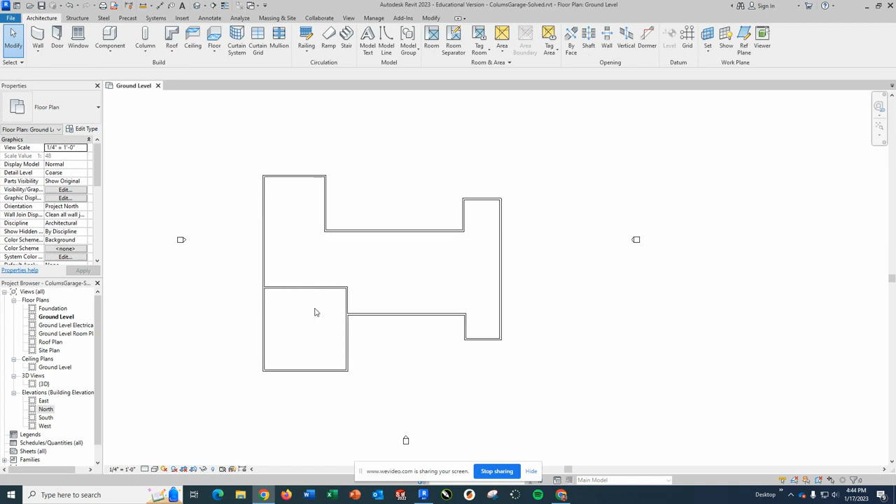This is the floor plan that you've been given, with the garage area as the only enclosed area. The rest of this, just consider the rest of the house. If you open the foundation level, you will see that you have your foundation wall and your footer already in.

So what we're going to be doing is working mostly in the foundation level, and we're going to be modifying it so that we can put in the correct foundation wall and footer to enclose the garage area. Because remember, areas that don't have space underneath that are a complete fill will have the footer and foundation wall enclosing them. They will be filled with something depending on what's available or what's used by code there before the concrete is poured for that garage area.

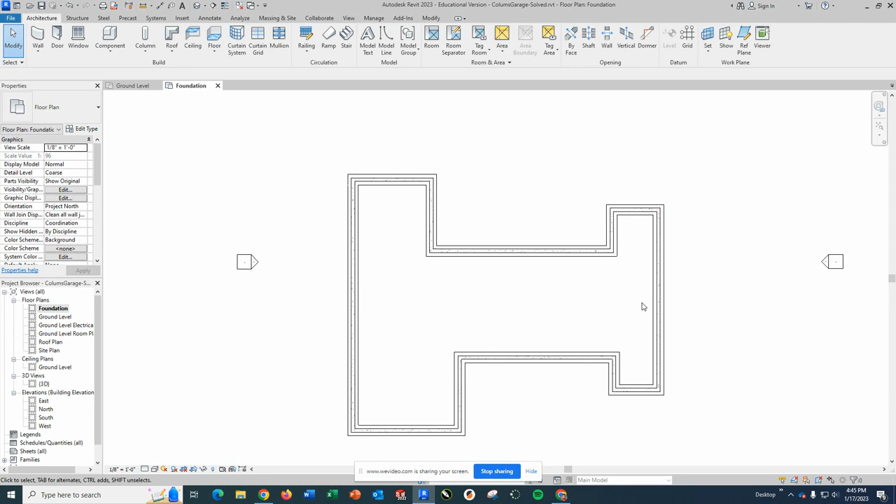In the rest of the house, a lot of this will be open space. And we will have to put, because what would happen, especially in a house of this shape, is that you would likely have a beam that runs down the middle, and we're going to support that beam with columns, and that's what we're going to put in.

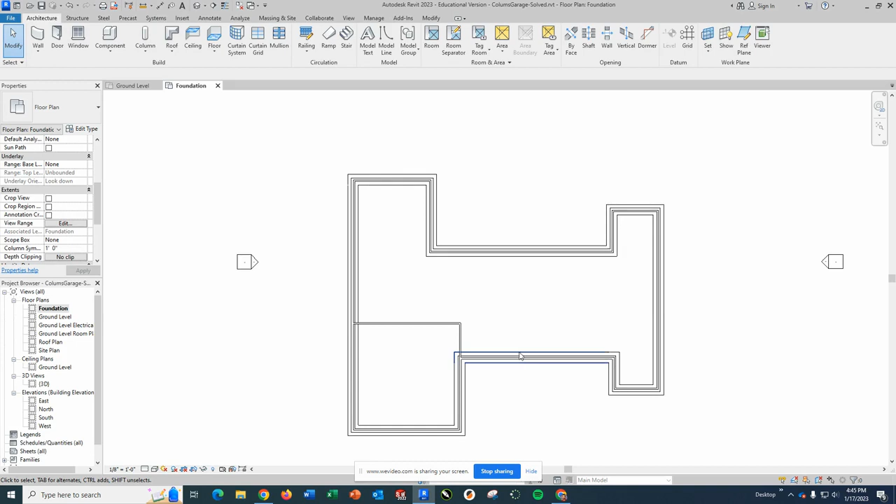So to start that, the first thing I'm going to do is go to my view range and set it so that my cut plane is above the ground level. So if I set it at 4 feet, I should be able to see all of the walls, which I can now do. And as you can see, some of the walls don't line up great.

So we'll actually do the garage foundation first. The first thing I'm going to do is pick a wall and do the regular foundation wall under this wall here.

So I'm going to have it be wall center line. I am going to set it so that the top constraint is ground level. I am then going to set it so that the base offset is 0. And when I hit apply, it says top constraint is invalid for this level.

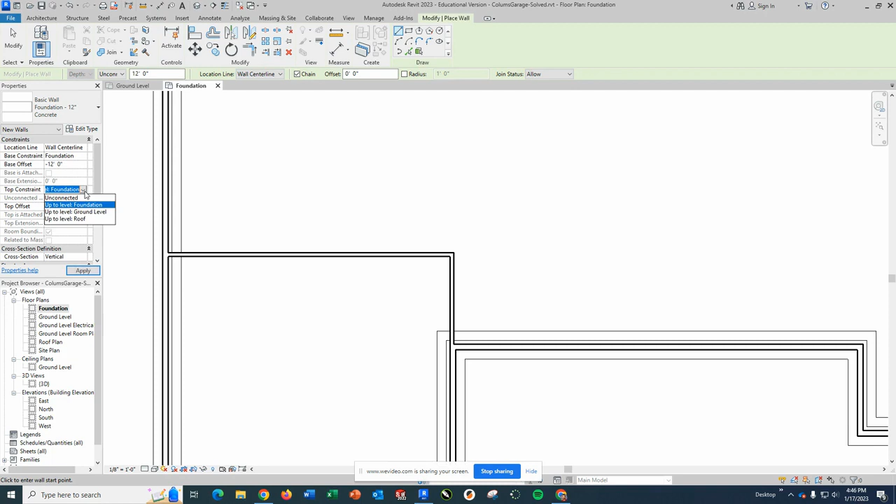Let's try that again. Interesting, so when I drew this, it was just fine for that to be the top constraint.

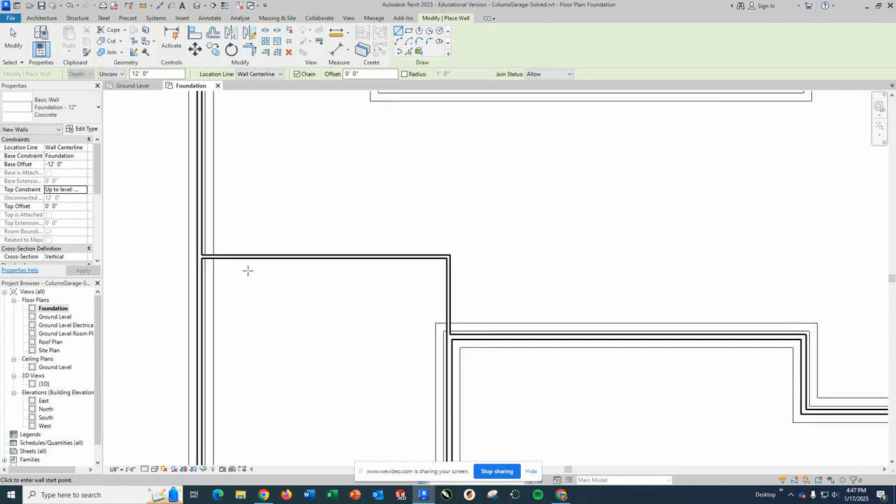So what I'm going to go ahead and do is draw the walls in, and then I'll adjust them after the fact. So using wall center line, I'm going to go ahead and put a wall from here all the way to the end.

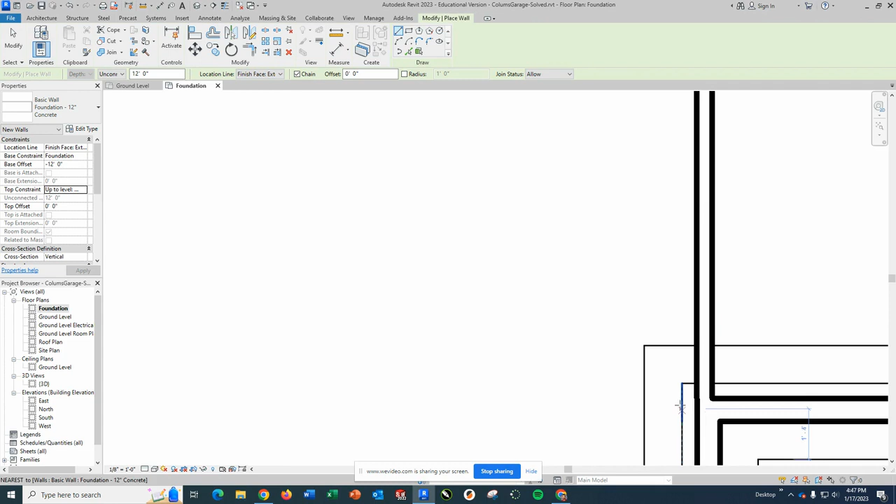Then I'm actually going to change to finish face exterior. I'm just going to be guessing, because what I want to do is line it up with this foundation wall here. So I'm going to click here. Yay, that did work. So I should be able to use finish face exterior and come up and click to merge those together. All right, so that's my foundation wall.

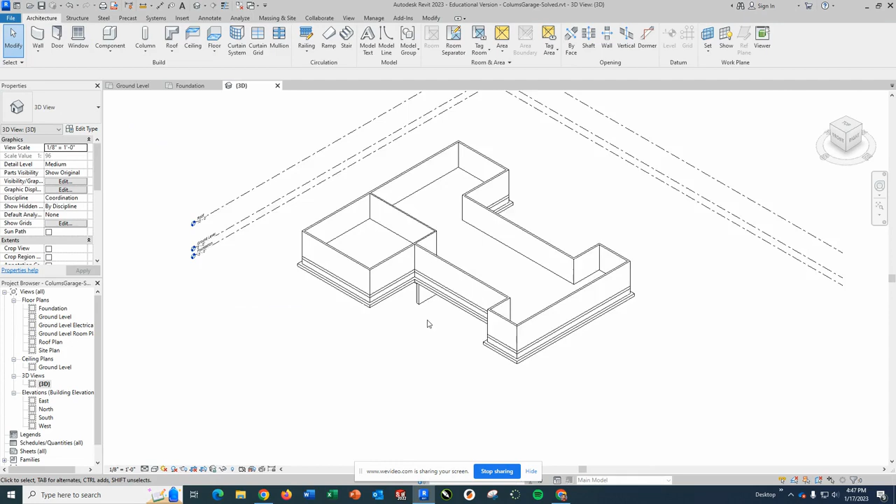What I'm going to do is actually look at it in my 3D view. And I'm going to see that the foundation walls are not where they're supposed to be. So I'm going to click each one and get both of those highlighted, then tell the top constraint to go up to ground level and apply.

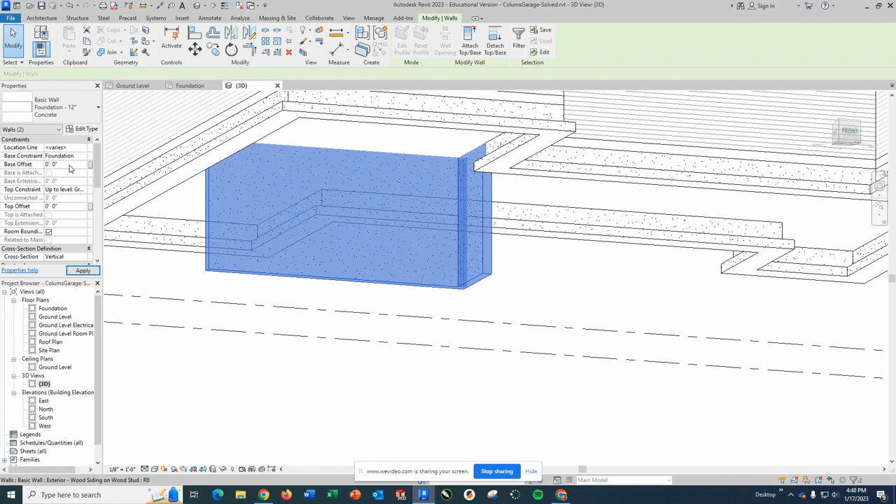So they now go up to the ground level. And I'm going to tell their base offset to be 0 and apply. So now I get actual foundation wall in there. It's weird that I had to do that separately, but that's okay.

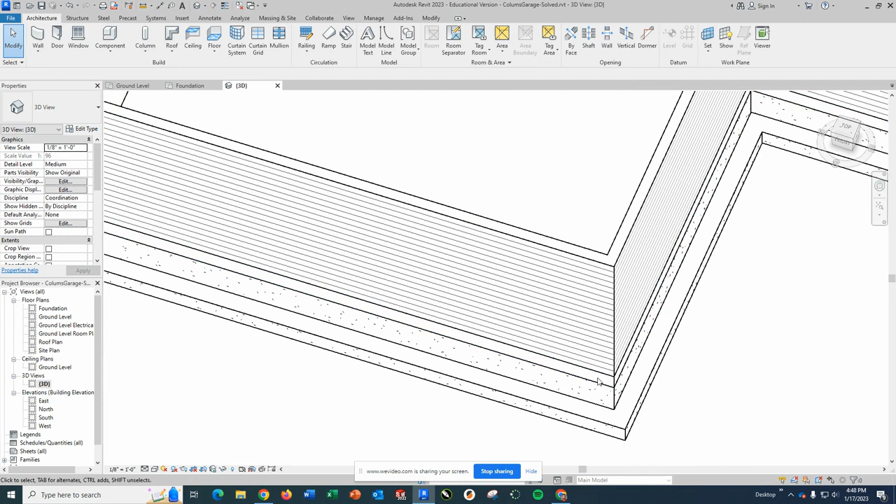You'll also notice that since I added wall underneath a floor that was already there, I do need to click on the floor. We've done this before. I need to hit edit boundary, and I need to accept it. I've already said yes to that whole cut things that are touching the bottom of it, so we should be good there.

The next thing I'm going to do, sorry, kind of flipped it around weird, is go back to my foundation level. You can see that those are blending in. I'm going to go ahead and go to wall, go to the footing, and set my base offset to -1.

It goes down 1, and I'm going to go ahead and draw these in. Oh, that's picking the wrong thing. I want to do these on a wall center line.

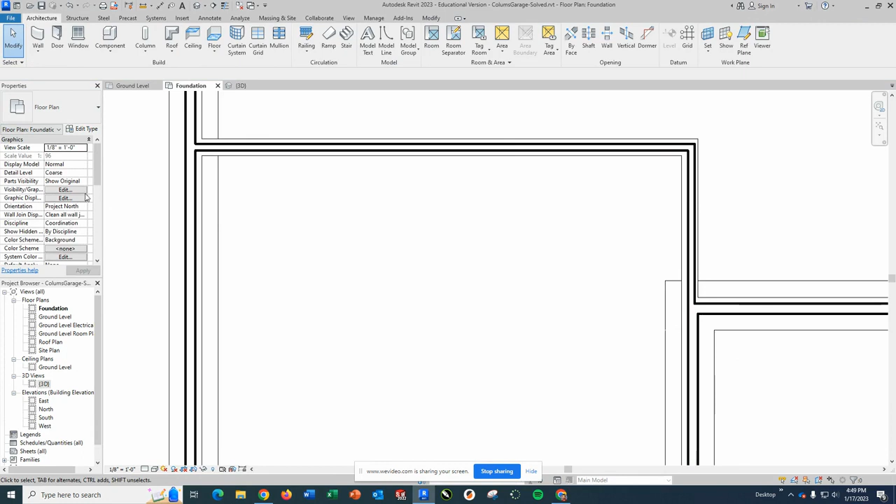So I'm going to do this the easier way. There's several walls that are in the way currently, so I'm going to go back to my view range, being that 1.5 or 2 feet above.

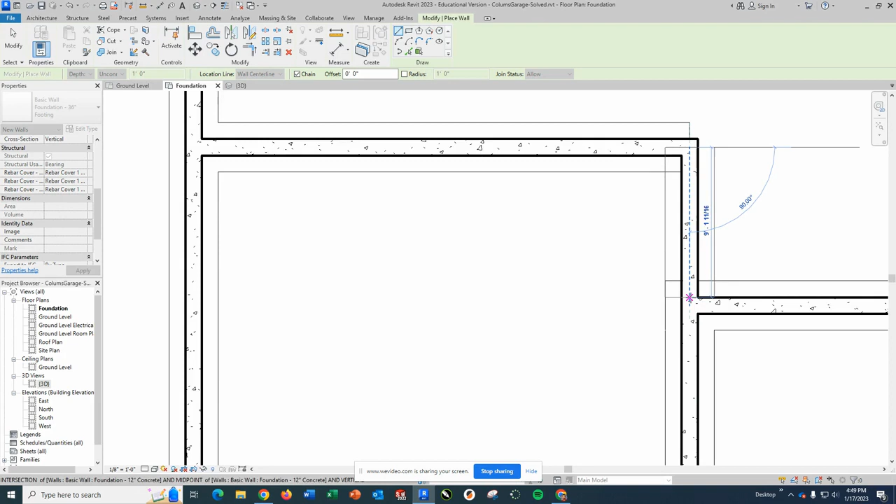So I just see the foundation wall because that makes this a lot easier. Back to wall, got the footing. Come here, down to the center line there, and that way I should be able to come down to right there. And it does blend in automatically. You may sometimes need to use the blending tool.

But that'll give you the legitimate garage foundation look you were looking for. Now, as we go into our support pieces, we're going to look at things. So as you can see, the majority of the house has the long direction running this way, so that's where I would have a long beam to help hold the floor up that runs this way as well. Based on that, it would likely be centered between these two foundation walls.

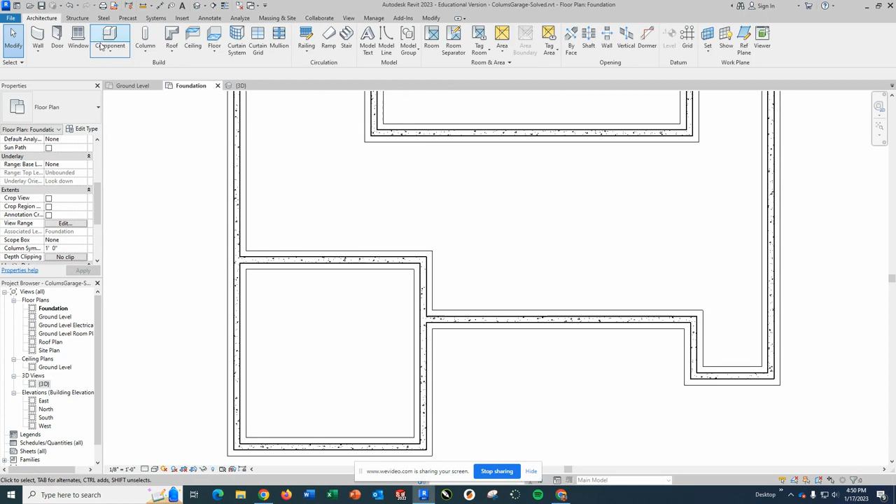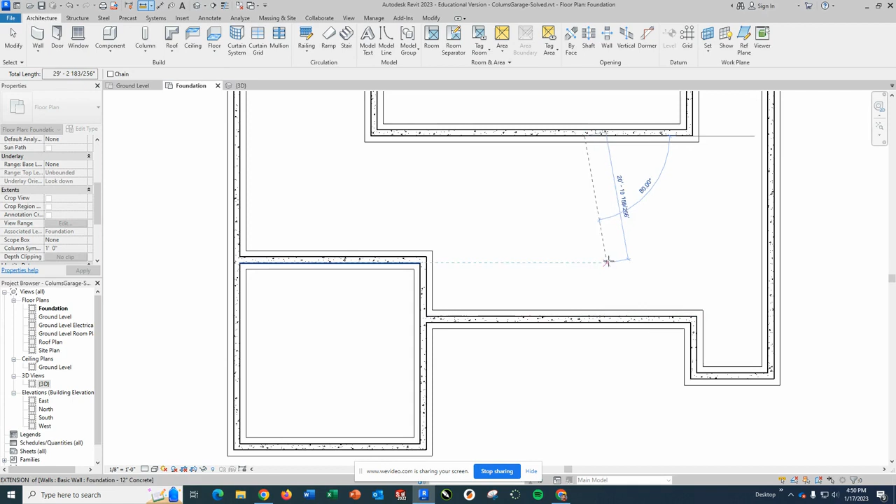The first thing I'm going to do is use my measure tool, measuring between this reference and straight down to this reference. You'll see it's at 29 feet 2.5 inches, or basically almost 30 feet. Okay, 29, 2.5 — I'm just going to remember that.

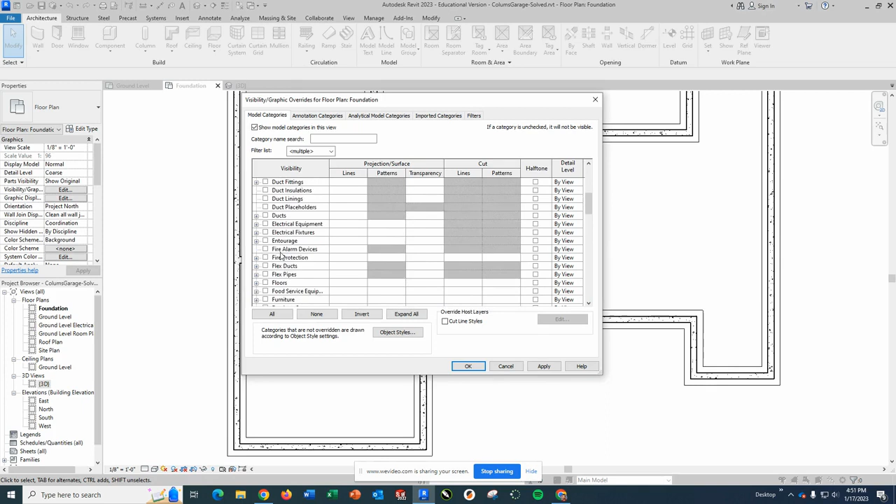What I'm going to do is take a model line. Actually, before this, I need to go to Visibility and Graphics, click Edit, and this window will come up. I need to turn on lines — they're in alphabetical order, so go down and turn on lines as well. And if you haven't already, make sure columns are also checkmarked so you can see both of those.

Then I'll go to my model line, and I'm going to draw a straight line all the way across here, which is good. Then when I click modify, I can click on this line and get a reference to the inside here.

So it's telling me right now that this is 15 feet 7 and change, and this is 12 feet 6 and change. So I'm going to want to even these out.

If I take my 29 and cut it in half, that would give me 14.5 feet plus the 2 inches. I'm going to try 14 feet 7 inches. That gives me 13.7 over here.

So I'm off by about 6 inches. I'm going to try 14 feet 1 inch. I got 14.1 and 14.1.5. So to make that even, I'll do 14, 1.25 and 14, 1.25. I've now got that line centered, which is exactly what I want.

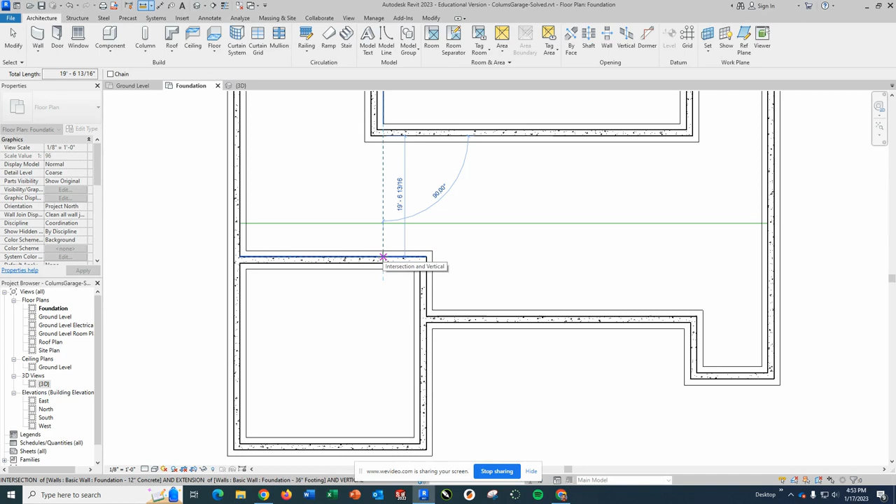Now, what you will see, and we have to measure and double check, is we want to make sure our spans are greater than 15 feet, which they are. This is right about 20 feet, so it may be arguable as to whether or not we need a post here. The argument could be made that we don't, but just for practicing, we're going to go ahead and put one there.

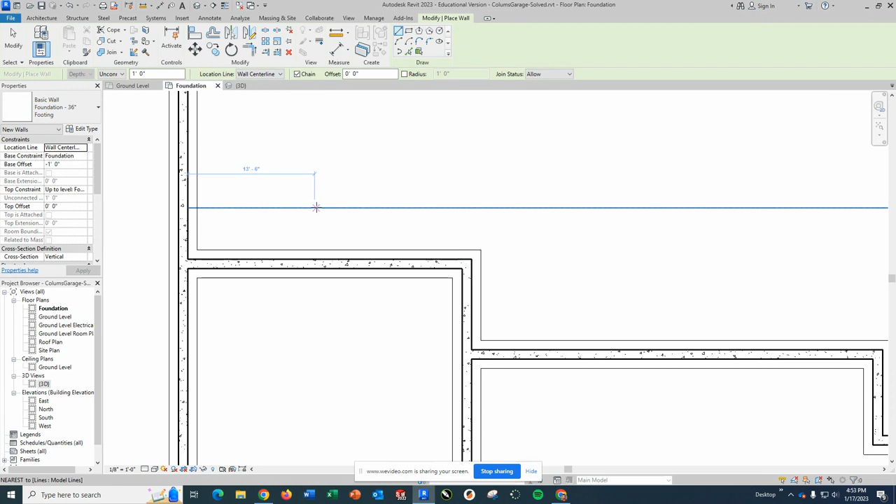So the setup will be that we will need a wall. It will be a footing, a regular footing, just like we've done before. What I'm going to do is make sure I'm on wall center line, and I'm going to click and draw 3 feet.

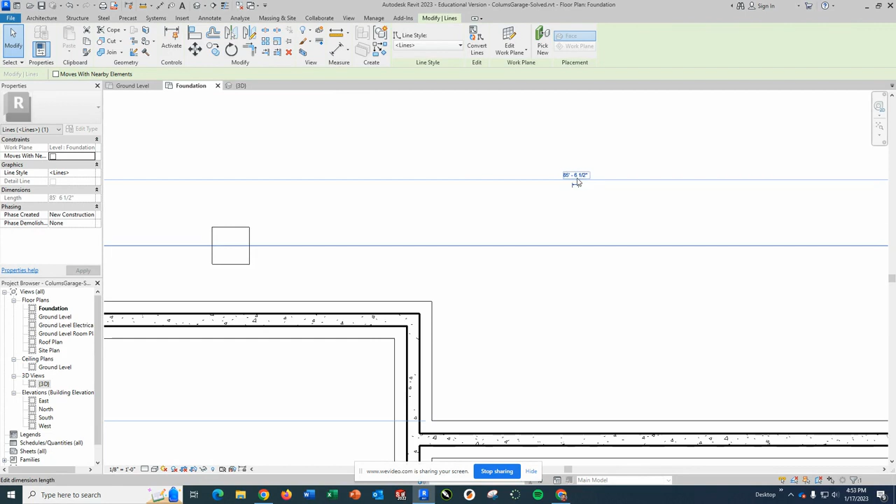Now I can also measure the length of this line, and as you can see, the line length is 85 feet 6 inches. So if I divide 85 by 15, because when I'm placing posts, I want to place them every 15 feet.

So I divide 85 by 15, and I get — let's see, 3 for 45, one more for 60. I can get 75 with 5 posts. Yeah, with 5 posts I get 75 feet. That leaves me 10 feet as a remainder. So I can actually add, since it doesn't make them more than 20.

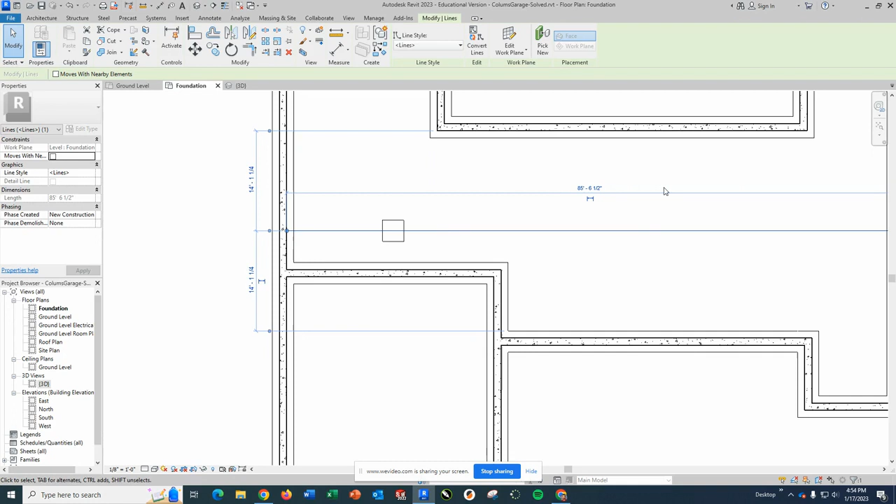So it should be like 20 feet from one, 20 feet from the other. What I'm going to do is go ahead and put this at 20 feet. The nice part is I can come back and adjust this.

What I'm now going to do on this piece is put a column. I have to say architectural column, architectural, because that's where I have the rectangular columns. Go ahead and get your 18 by 18 and go ahead and put it in the center.

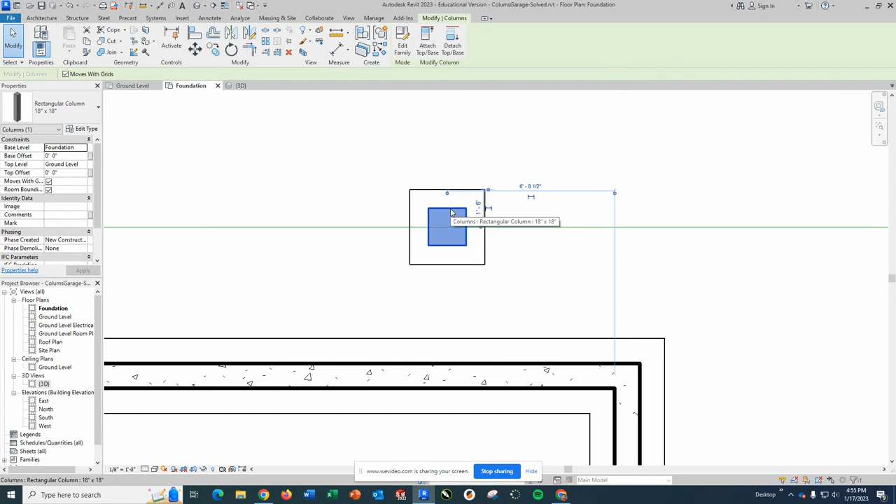And you can find that midpoint, which works perfectly. I'm going to click the column and make sure that the top level is at ground level, with the top offset at 6 inches, and the base level at foundation. That's just fine.

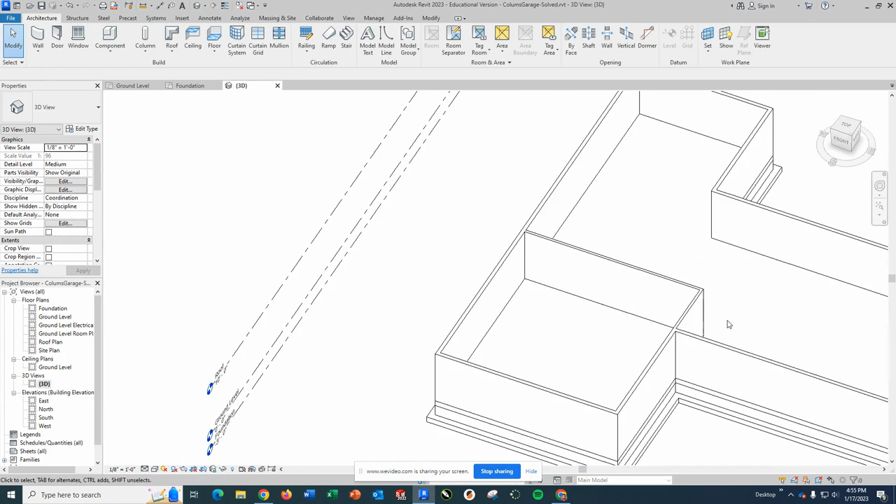Okay, so that's perfect. If I look in my 3D view, I don't see... oh, I'm sorry, that should be - see how it's sticking up? That should be a negative 6 inches, so I want it to go down 6 inches so I don't see it sticking up out of my floor. Sorry, negative 6 inches.

It does not want to change. So we're going to go ahead and try typing the number, negative 6 inches, again.

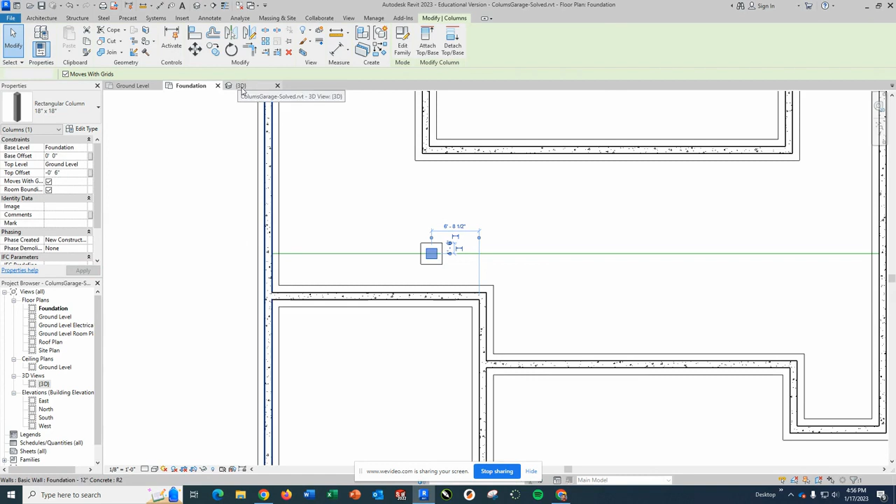Let's go back to our foundation. Maybe it has something to do with my view. Negative 6, enter. I'm going to highlight the whole thing. Negative 6 inches, enter. It didn't like me putting the negative sign just below the 6, or just in front of the 6. So now you'll see that I can't see it - it pokes into the floor, but not up through it, which is perfect.

Okay, I'm going to double check my measurement here because something just looks off. So we're going to double check our measurement, and we're going to go from here to here. Nope, I think that's good.

All right, so then we're going to highlight this, and what we can do is an array. We can click on any point on our grouping there, and we can pull out and set it at 15 feet, either by clicking or by typing. I can up it, so that makes 2 copies. If I push 3, it makes a 3rd copy. If I click on it, 4, it makes a 4th copy. What I'm going to do at this point is go ahead and accept it.

And I'm going to grab my measure tool, and measure from this over - it's at 16. So as you can see, my math was just a little bit off when I placed the original. So I got 16 and a half that way, and then I've got 21 that way.

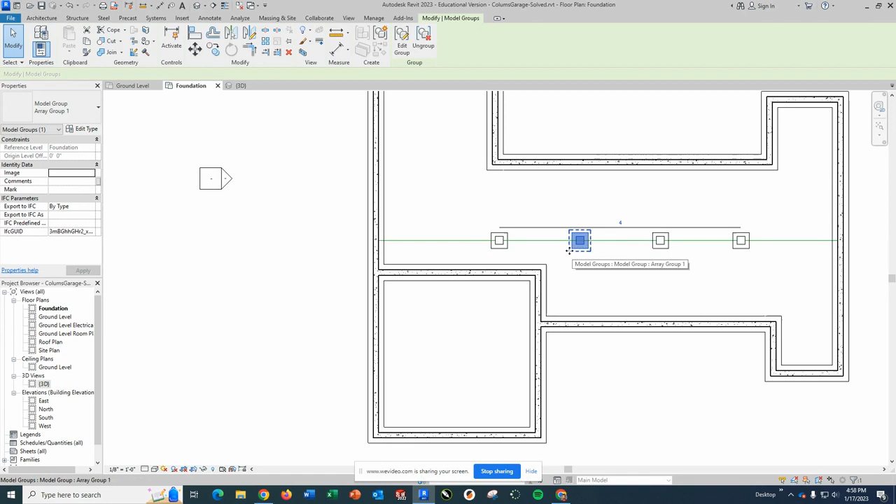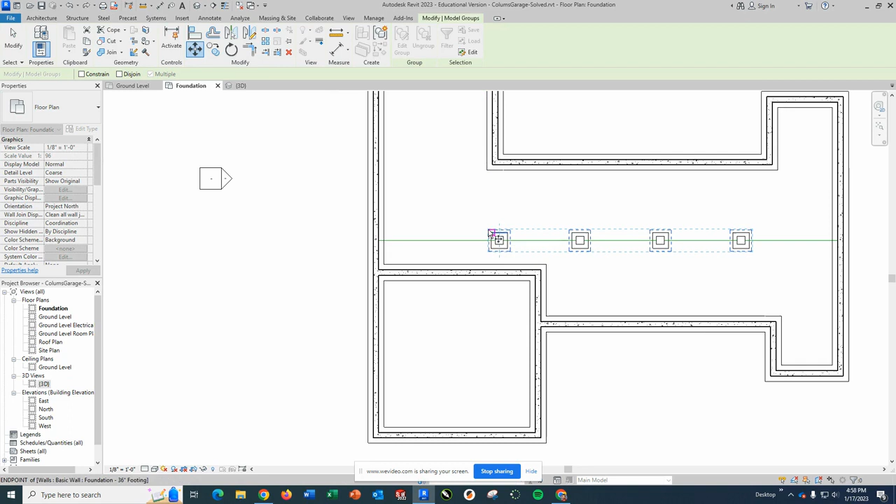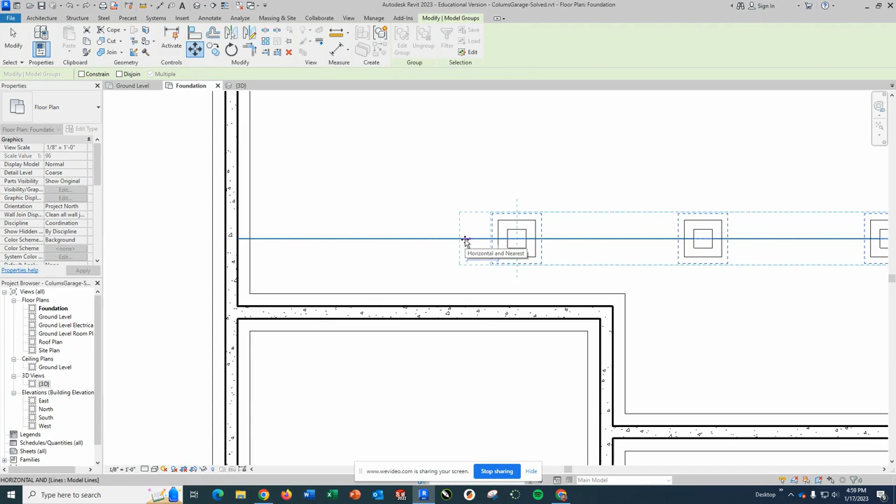So what I can do is move these over. Sorry, that was not the right one. Let's see here. So if I highlight all of these, I should be able to move them. I just grab a point, a reference point, and seeing what the difference was, I'm going to move everything 2 feet this way.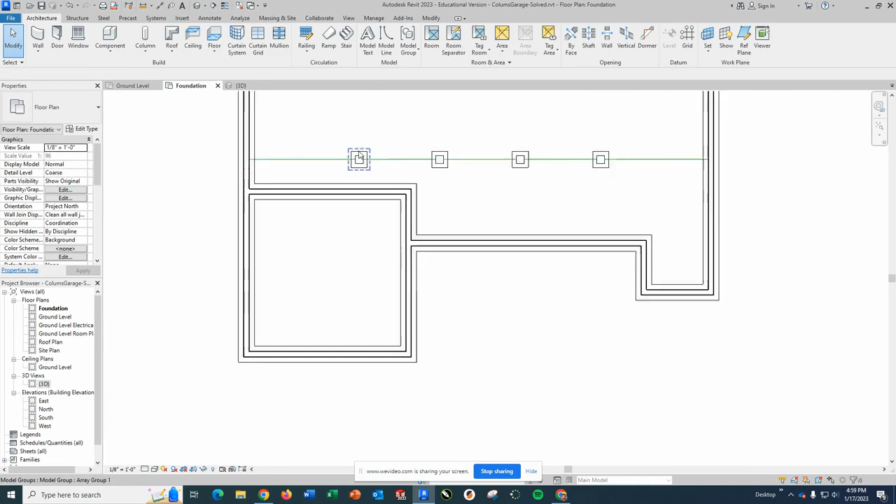So as you can see, I can then go ahead and highlight the whole group. I can click move, click my reference point, and go in the direction I want to go in. Actually all I need to do is move it about 3 inches, so I can type in 3 inches and press enter. That'll scoot everything over and I'd be able to measure this again.

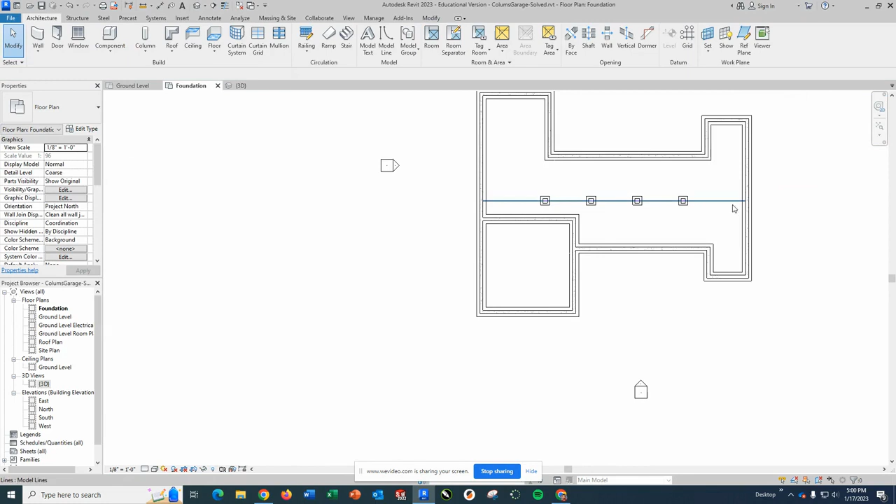Now, if you don't want this line, you can right click on it and just hide that in the view. That way, if you need to do some more laying out, you can.

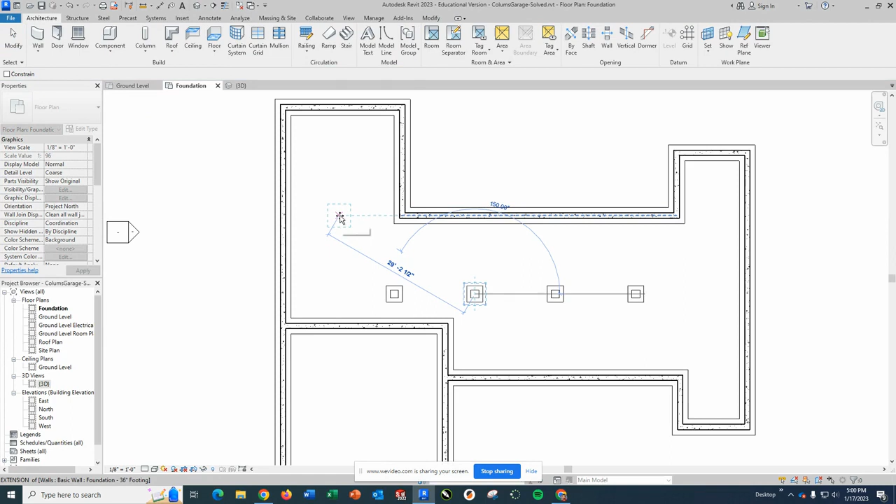One of the other things is I would need some support over in this area. So if I highlight one of these, copy it, click off, paste it, I can position this in such a way that I can also move this around and locate it.

It might have been easier to actually use some model lines and locate this so that it's about centered in here near the outside. But based on the size of this area, we would need to support this in the center. So after looking at everything, I would put it near the outside here.

And what I would do is use a model line from the midpoint straight out. I'm going to actually make it longer than I need it, and I'm going to go ahead and move this.

I'm going to click this line, make it 18 feet, and move it back to the midpoint of that line. I don't know why it came off.

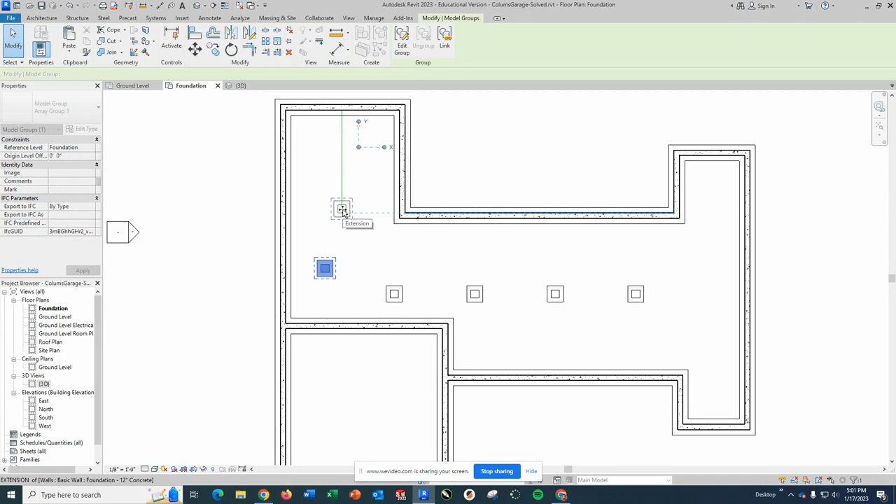And then if I pick it up by this center point here, actually put the center point right on the end. There we go, and get that right about in the right spot.

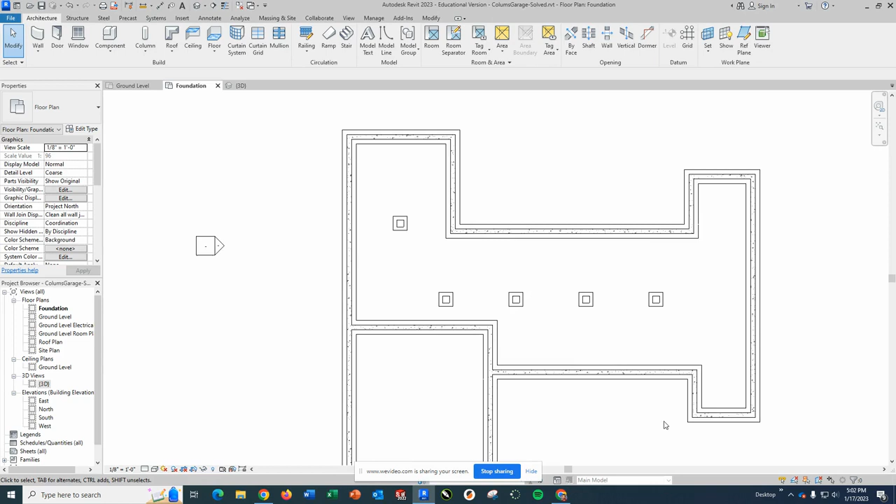And again, I can then hide in view element so I can hide those individually. I don't need to do those over here because they are close enough. And then with this point, we're good there. So this will do it - so I should see something like this turned in for your activity.